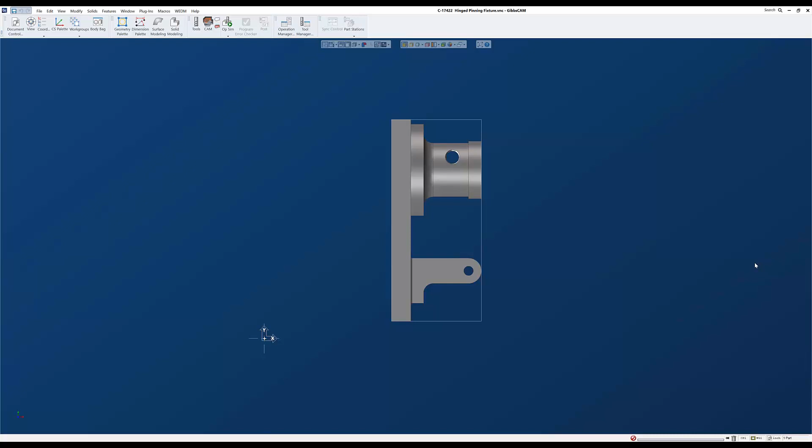In this GibbsCAM Tech Tip, we'll look at how to get a model oriented and positioned correctly in the GibbsCAM workspace when it opens in some combination of 90 degrees out of the desired position. I want to position this part with this face up and the cylinder feature to the right. I also want the origin to be set to the top left rear corner, which once we get the part in position will be this corner of our work envelope.

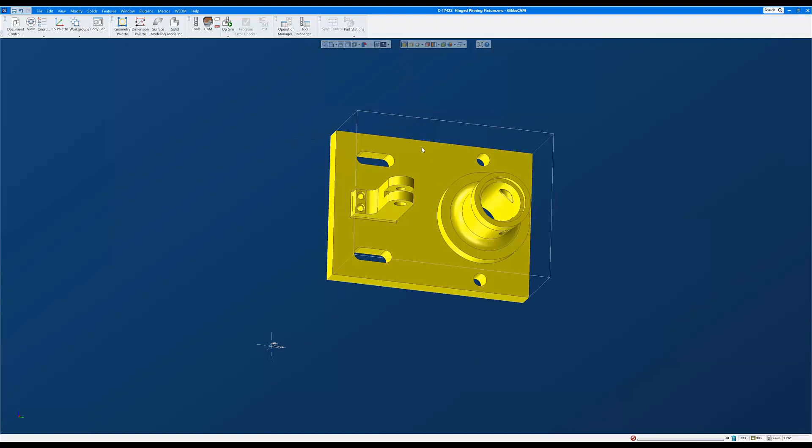So the first thing I need to do is get the top of the part parallel to the XY plane and facing up in the XY plane. So I'm going to select this face, and if you select the face and the entire model selects, just turn face selection on so that you can select and work with individual faces. So I'm going to select this face, right click on it, and come down to Align Face to CS.

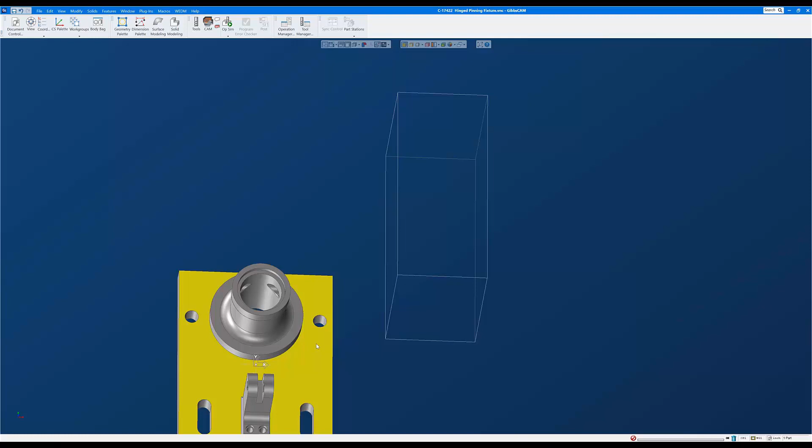And when I click that, what happens is the part will move to the current coordinate system with the face that was selected pointing up in the coordinate system, and the origin of the coordinate system will be in the center of the face that was selected. So we're now looking at the part in this orientation.

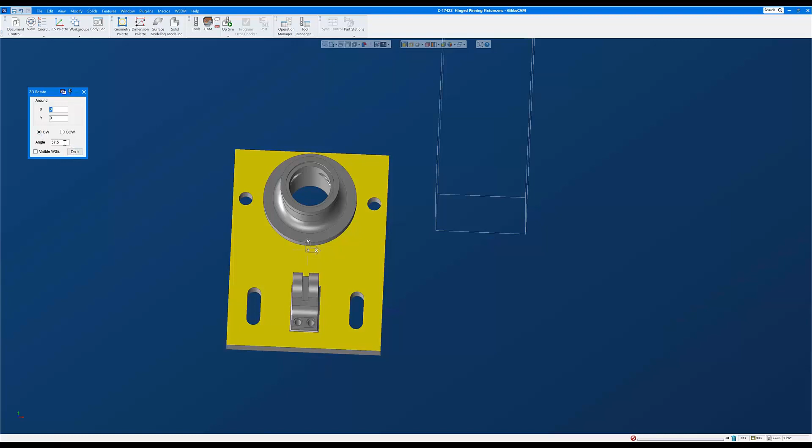So we're flat to the coordinate system, but I still want to rotate this so that the cylinder feature is to the right. So with any portion of this part selected, I want to come over to Modify and 2D Rotate. I want to rotate this part around the XY origin clockwise 90 degrees. And while I'm here, I'll go ahead and go to Modify and Shrink Wrap to fit my stock definition around the part.

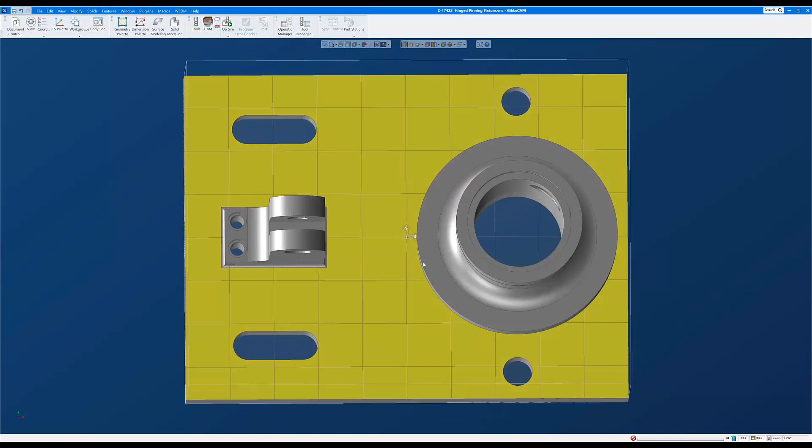So we're now looking straight down on the part like this. So the part's in the correct orientation. We simply need to move the origin to where we want it, which is this corner. And that corner is made up of essentially this face, this face, and this face. This will be the X origin, the Y origin, and the Z origin.

So with the part kicked around where I can see those three faces, I'm going to go to Modify, Move Part Origin, and with the X field highlighted, I'm going to hold down the Alt key to activate the interrogation cursor, and I'm going to click on the face that I want to be the X origin. And when I click on it, it'll fill that X value in with the lowest X value on the face that I clicked on.

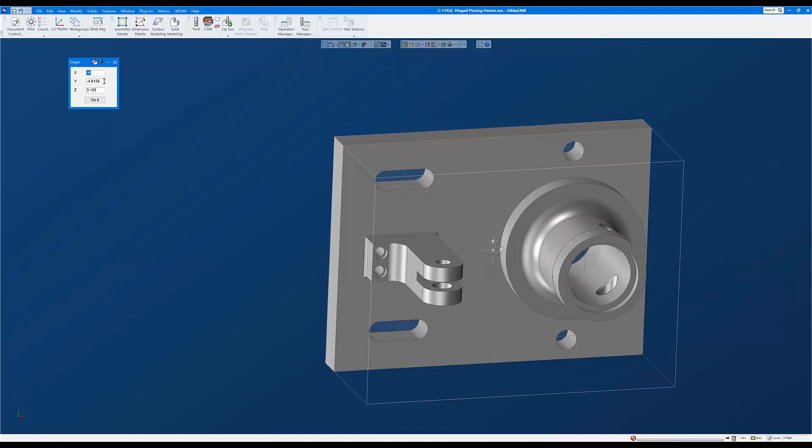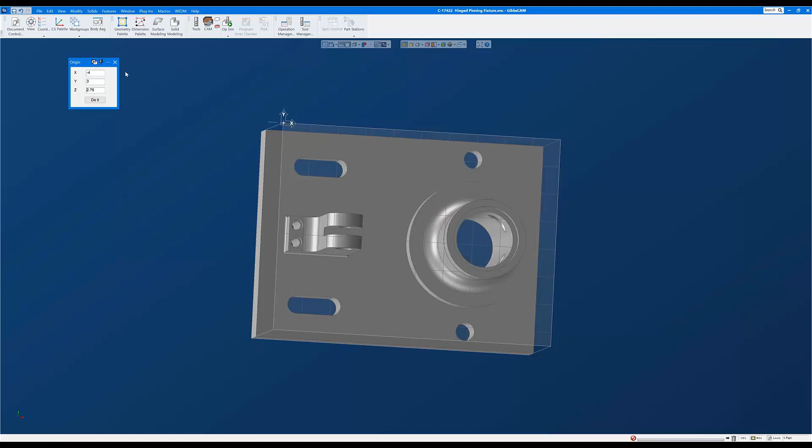I'll click in the Y field, Alt click on this face for the Y origin, click in the Z field, Alt click on this face for the Z origin, and hit Do It, and my origin moves to the correct corner. Now this part is ready to be saved and then start developing toolpath on the model. However, I'm going to undo back to where we started, which is here.

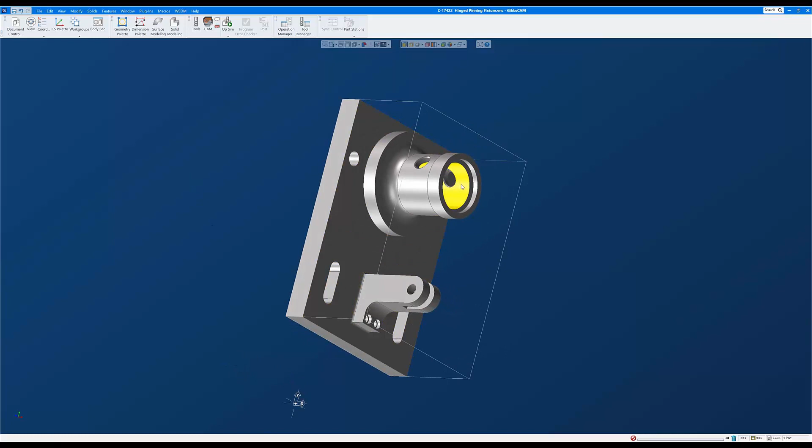And I want to look at this from a slightly different perspective. When I do this part in class, it's not unusual for me to be asked, well, what if I wanted the origin to be the center of the bore rather than a corner of the work envelope? And frankly, the bore is more realistic considering this is a weldment especially. So let's take a look at that briefly.

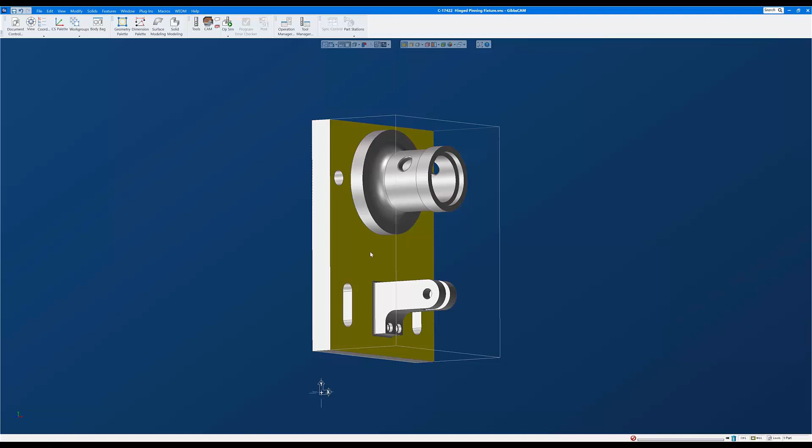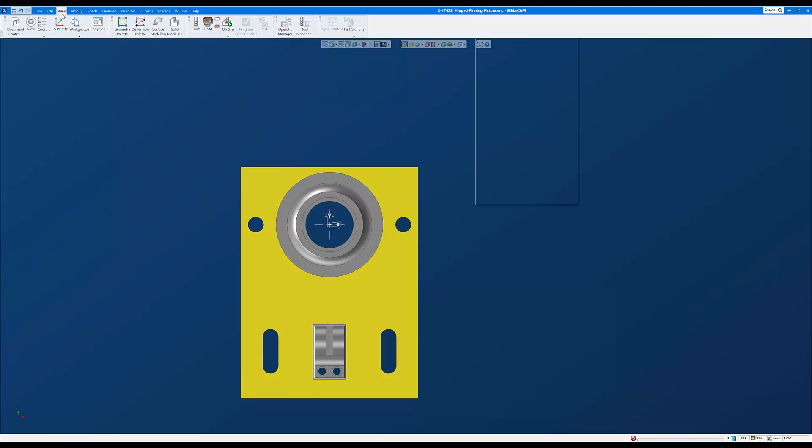The process is going to be the same, except that instead of aligning this face to the CS, I'm going to align this face to the CS. And what that will do is it will move this part. So I select that face, come down to Align Face to CS. It puts the center of that face on the XY origin. So our origin's already correct. The only thing remaining to do is to 2D rotate the part to put the bore feature or the cylinder feature to the right, and then to shrink wrap.

And now this part would be ready to save and begin developing toolpath with the origin at the top and centered on the bore. So this is a simple way to orient models that import or open out of position but are still oriented to a primary plane in GibbsCAM. In other words, they are some increment of 90 degrees out of plane or out of position.